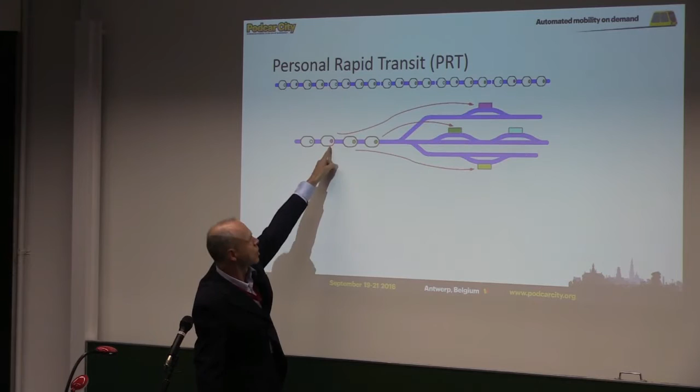Okay. Now, of course, there is the idea of personal rapid transit, where each vehicle contains a person or maybe two, and they have their own destination. So each person here with a color reaches its destination. Here I put the same color, so you see that. Just to explain the concept, and that's pretty known. It's a full individual service, but it has really a low capacity.

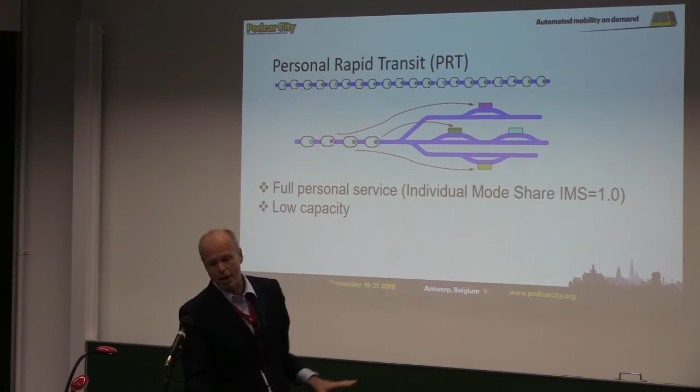And why does it have a low capacity? Because so far there is the brick wall stopping criteria, and that imposes that.

Is that a laser or something?

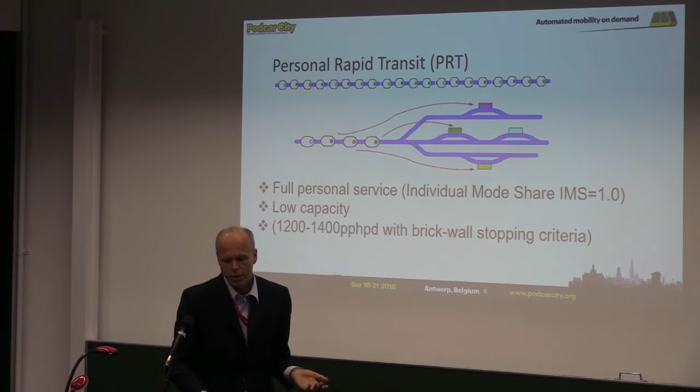Oh yeah. Okay, so it imposes that there is a certain space, and we leave this space. The capacity is quite limited. Right. So what do people do? The first thing you do, you increase the number of people in the pods, and you say, okay, we put four people inside. For example, we keep the size. We put 4 people inside, and we let this be kind of a collective system, like a small bus system.

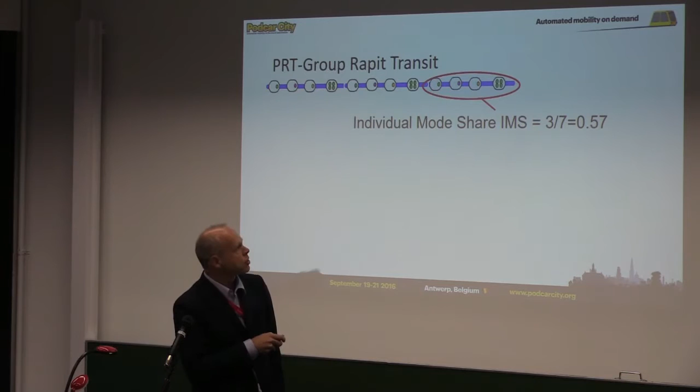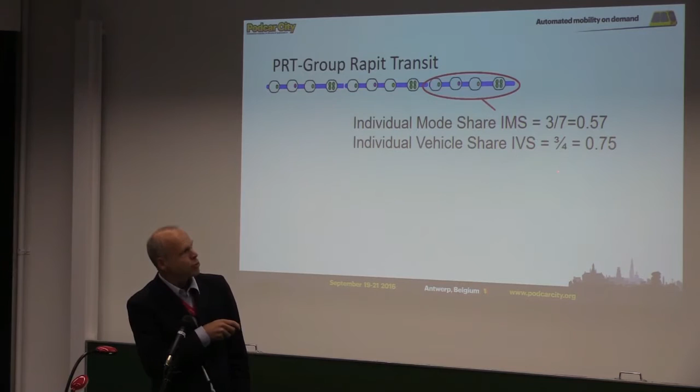I just want to say here that I introduced the variable individual mode share. This is just the number of people with individual destinations, and the rest is, of course, then collective destinations. There is also the notion of individual vehicle share, which is different, but these two are linked. But the individual vehicle share is actually determining the capacity.

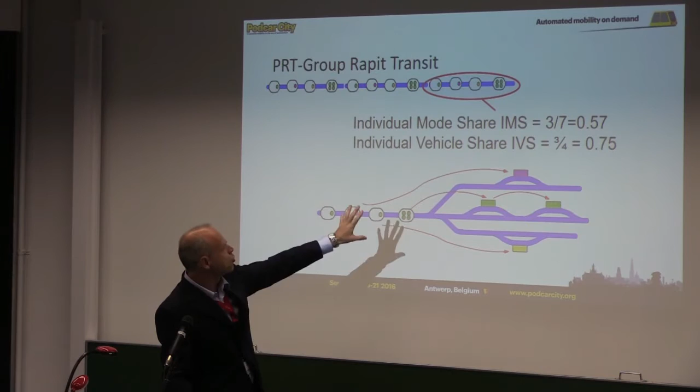But okay, so the idea is this collective vehicle is stopping. It's like a bus, while the others are directly going to their destination. This is just to illustrate that the concept is already known. And okay, if you do that, you're better with your capacities. Depending on the speed, you can reach 4,000, even with a small PRT four-passenger vehicle.

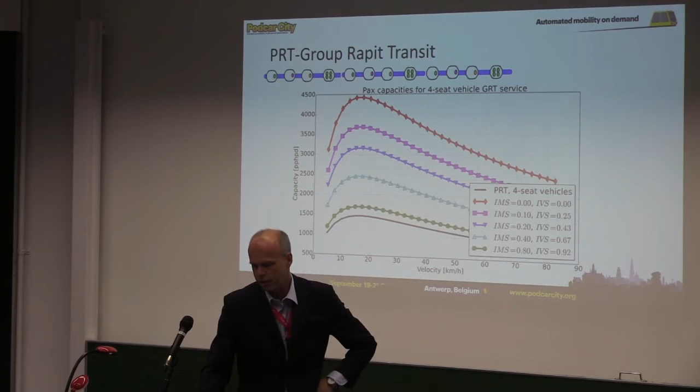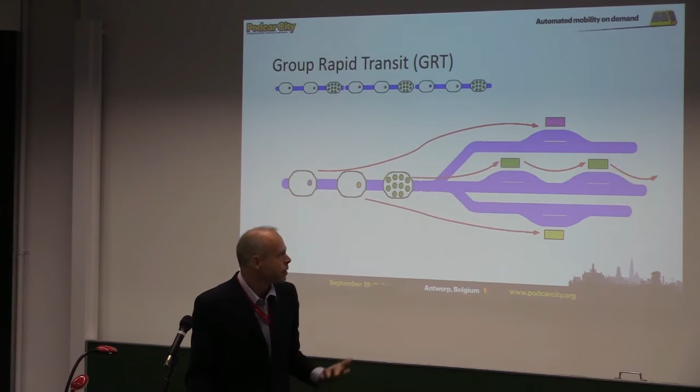If that is not enough, you just grow the size of the vehicle, and this is what most PRT producers do, making vehicles bigger. You can, for the collective transport, the kind of bus that stops over, get higher capacities, but you still have the individual persons that want to travel. You see that, but they need bigger vehicles. So all your infrastructure gets bigger, stations get bigger, and this is for all collective transports.

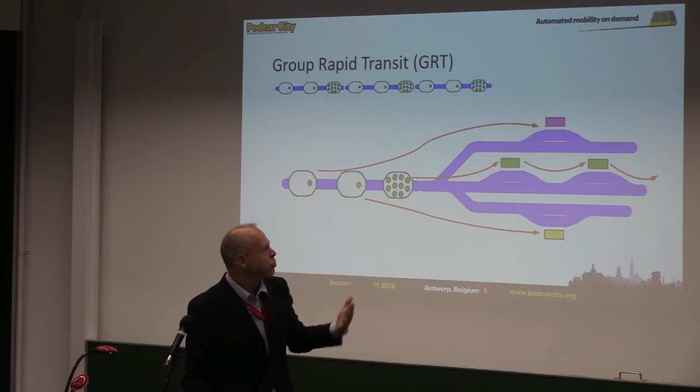Your trip for the individual here gets slower because it needs to stop everywhere. So you get a slower speed, and you need actually more vehicles to provide the same service with respect to individual vehicles, because you slow down the service.

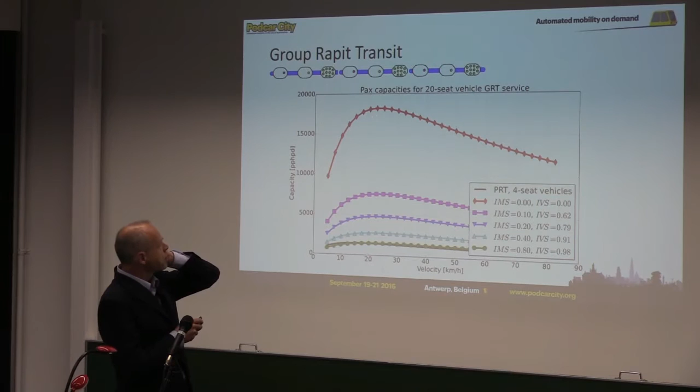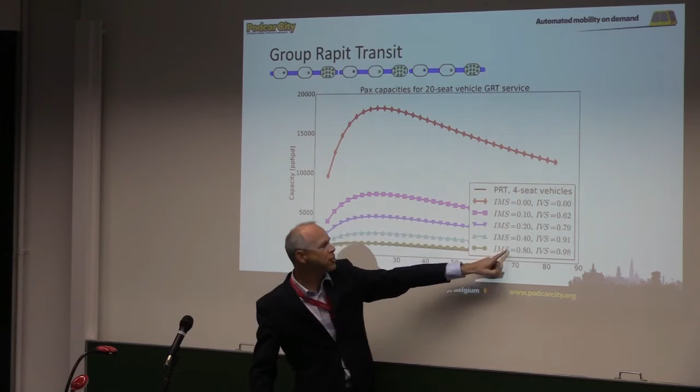Right, you can get high capacities, really up to 20,000 or close to 18,000, dependent on the individual mode share, because the more individual vehicles you have, the lower is the capacity, and it drops pretty fast, you know. So if you have 80% individual vehicles, you have the same capacity as you have with a normal PRT. So that's kind of not so great.

And the other possibility is, of course, you chain, or you form trains. Okay, you form trains, and you put them together, and you do actually the same thing, but with trains. So your infrastructure remains the same, same vehicles, but your stations get a bit longer, of course.

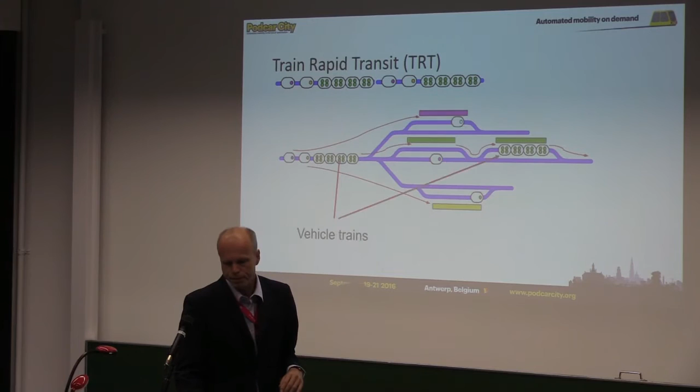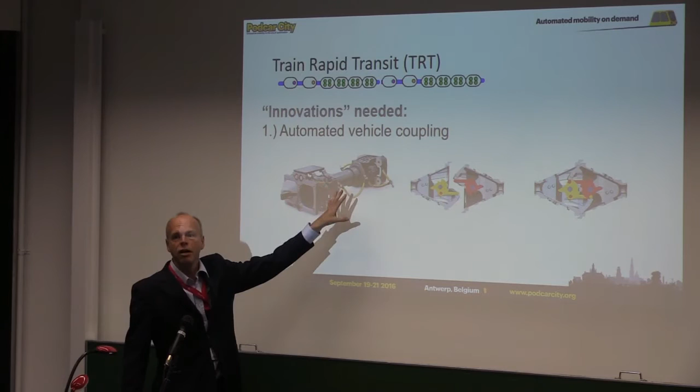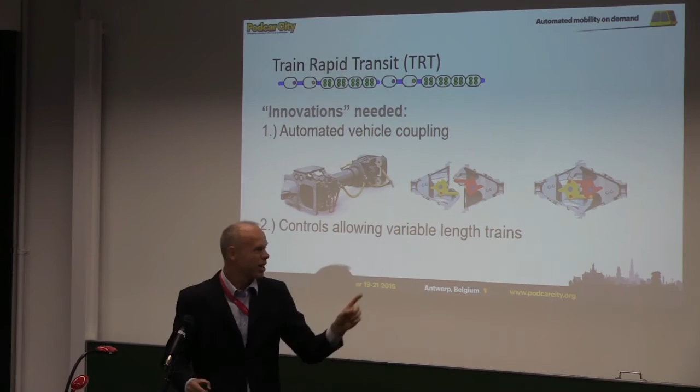Yeah. What do you need for that? You actually don't need so much innovation. You need automatic coupling. The concept of that exists already for over 100 years, so that's pretty known and used also in normal trains. Probably scale it down. And you need a control system that allows variable length trains. That's a bit tricky, and that's probably why most producers didn't go this way.

Still, if you do that, you can reach also 20,000, and you can even reach it at higher speeds, and that's good news, because the faster you run, the more trips you do, the more you earn, right? Okay, and there is another extension to that. Yeah. Just in the previous slide.

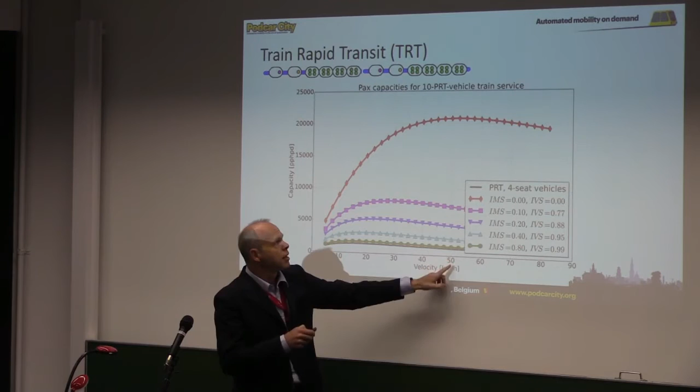Previous. Your capacity doesn't seem to increase when you go beyond 50 kilometers per hour. Why is that? Sorry, here's 50. And then the volumes don't increase. Yeah, it's because of the brick wall stopping criteria. Practically, the distance between two vehicles increases with the power of 2 with the speed, and the flows increase only linearly with the speed. So you get this drop. Yeah.

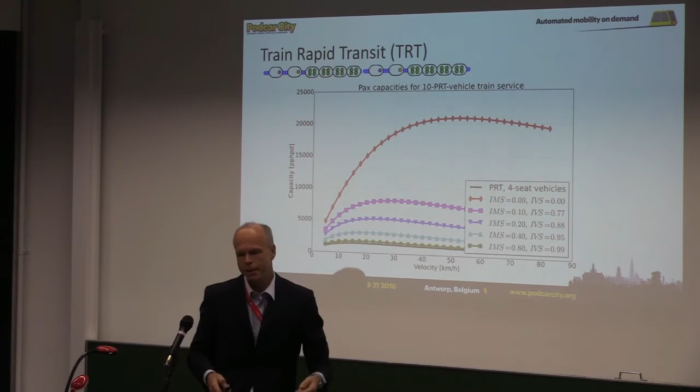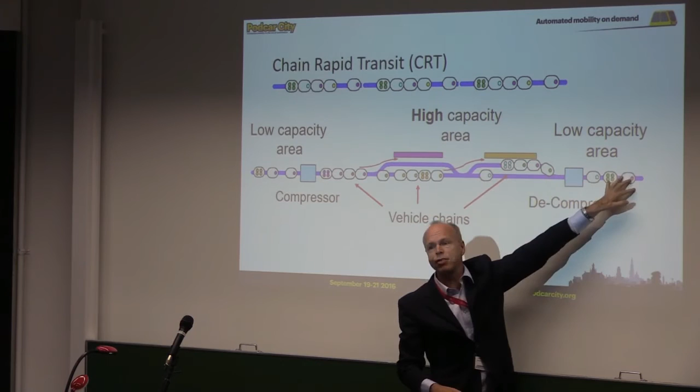And then they reach their destinations here, and then probably other people go in, and they want to go out of the high capacity zone, and they have these different destinations. And then they run through a decompressor, and then the vehicles are individual again, or low capacity here, of course. So how does that work?

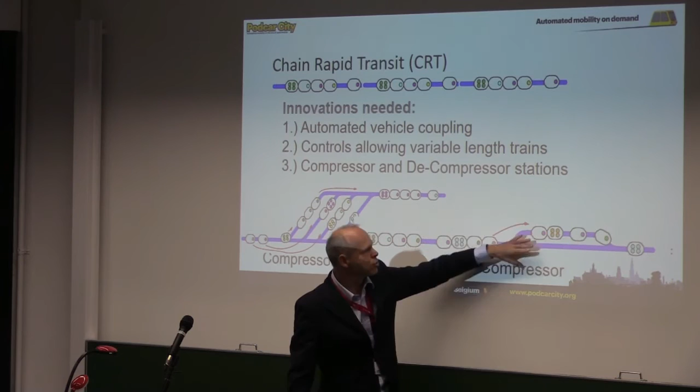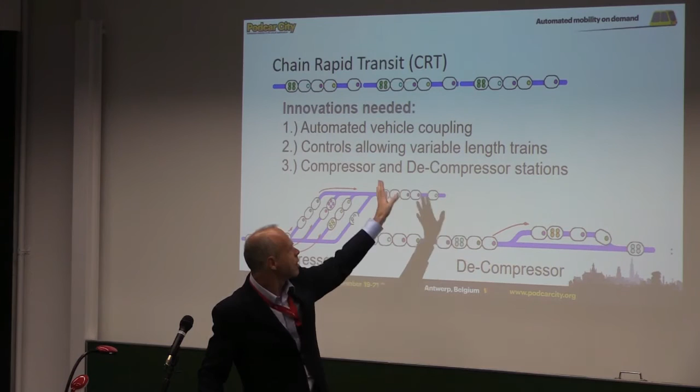Okay, the innovations needed are the same for the train system and these decompressors. This, for example, is a compressor, right? And here you just chain up vehicles with the same destination, all right? And then you create chains. And a decompressor, that's a normal station, right? You just stop, and then you run off one after the other, and you have decompressed the thing. So it's nothing new. Brick wall stopping criteria, couplers. It's all nothing new. It's just different organization.

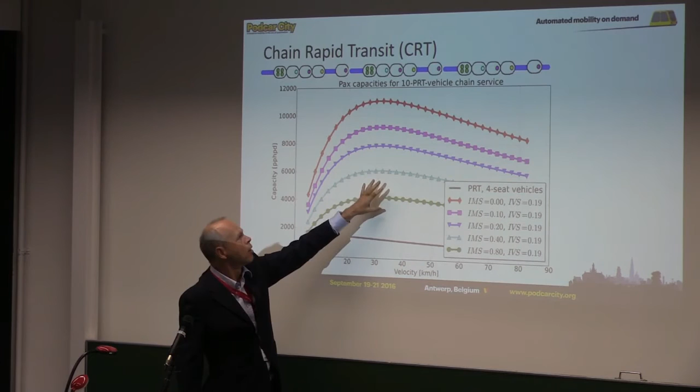Okay. Yeah, and then you can reach also 10, 12,000 passengers per hour, but the big difference is that you're no longer so sensitive with respect to individual mode share. So you can run individual vehicles without being penalized so much in capacity, and that's very important. So you can offer individual service also at higher capacities.

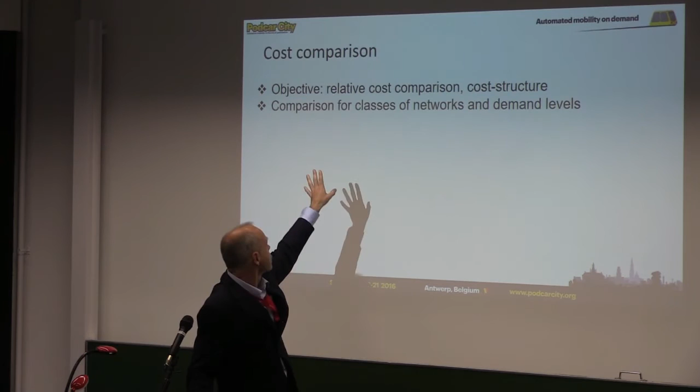Yeah, cost comparison. I did a cost comparison, and of course in the cost comparison I need to put in some costs, but these costs are a kind of target costs. I mean, if you go now to the producers, they will give you different costs. Yeah? But these are costs already with some volumes of vehicles in mind. And in this comparison I also compare network classes. So not an individual city, but a class of city with a certain demand structure.

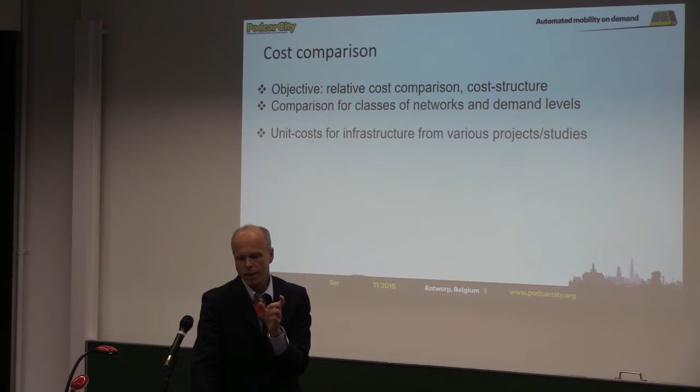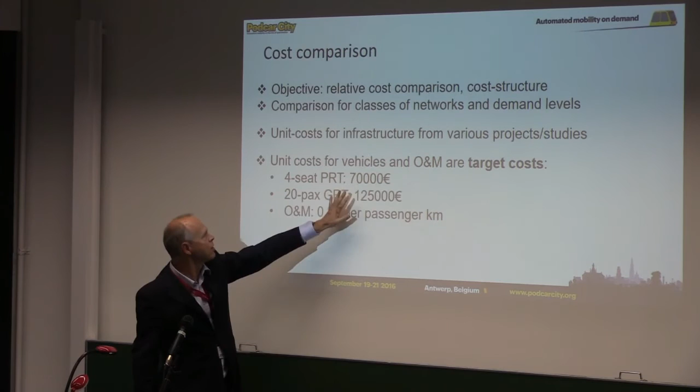Okay, so the unit cost for infrastructure, I got that from various studies. The O&M, they are pretty known, right? At least average values. And here I used target values: 70,000 for a 4-seat and 125,000 for a 20 passenger vehicle. O&M is 0.2 euros per passenger kilometer. These are all values that are still reasonable. Ticket price, I just had to set a ticket price to make the comparison: €1 for a collective trip, €2 for a personal trip.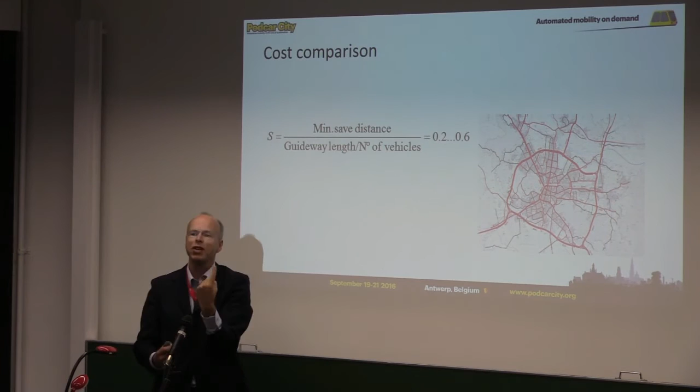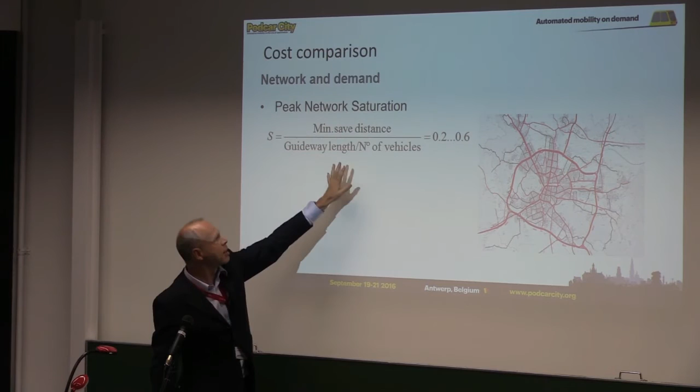All cities have during peak hours a certain demand structure, a pattern, right? And this pattern can be condensed down to two variables, and this is the peak hour network saturation. So this is the minimum safe distance divided by guideway length divided by number of vehicles, and this is usually 0.2 to 0.6. Professor Anderson actually proposed that as a way of analyzing networks,

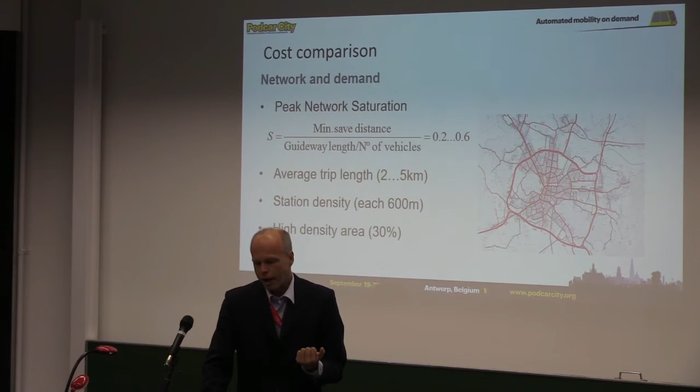and this is pretty cool. And I need the average trip length. So these two variables can quantify the demand level and how the demand is distributed. And from that, I need the station density, which is 600 meters. Okay. And I also introduced a high density area, which I assigned with 30%. All these can change, but they change only in a certain range.

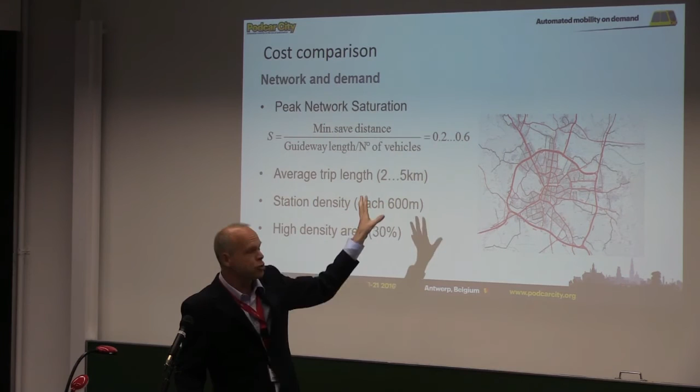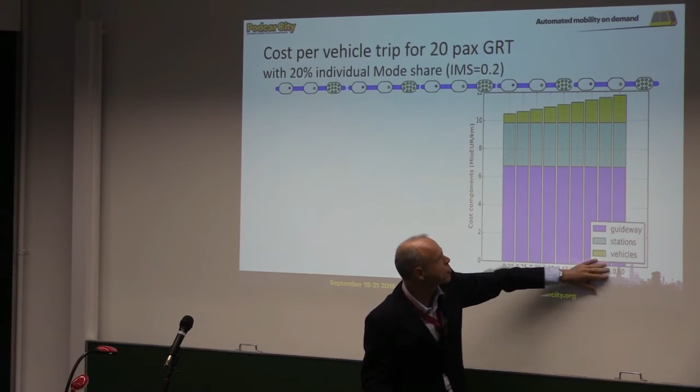All right. So what do I get out of this analysis? This is, for example, a group rapid transit. This is the cost structure: guideway, stations and vehicles as a function of the network saturation. And if the network gets more saturated, I need more vehicles, of course, and they cost more.

On the cost side, so this is the line. So this is cost in euro, and this is the price I get for one vehicle trip, right? And these are the costs of one vehicle trip. So these costs should be, of course, lower than what I get from the ticket. Right? And I did that for different network saturations. Again, your city will be somewhere here, definitely.

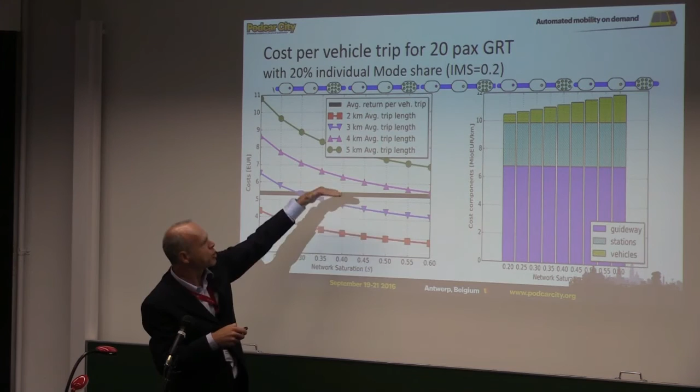And here, these different lines are for different kilometers of trip lengths, right? And of course, the longer the trip, the higher the cost, right? And so you can see here from which trip lengths on you can actually make profit. Average trip, of course. All right. 2 minutes. Okay.

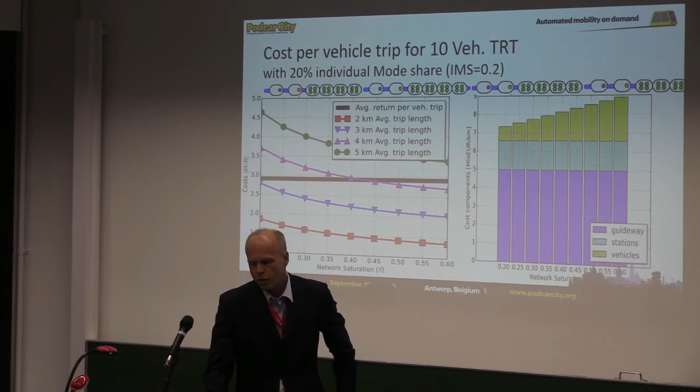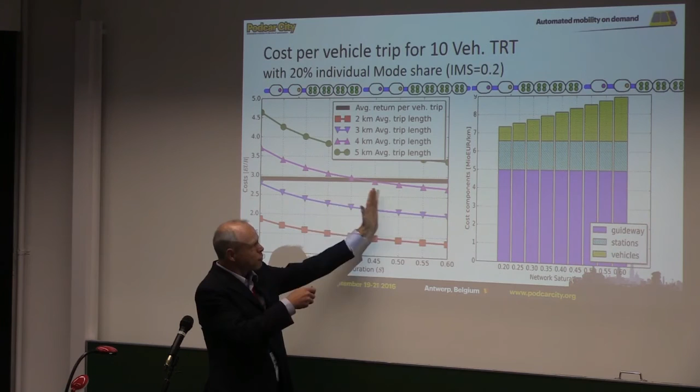And right, I did that for different systems. You can see that, for example, for the train system, you can get a lower cost. So you have a larger range to get the costs under what you gain. Right, and this is probably the most interesting diagram.

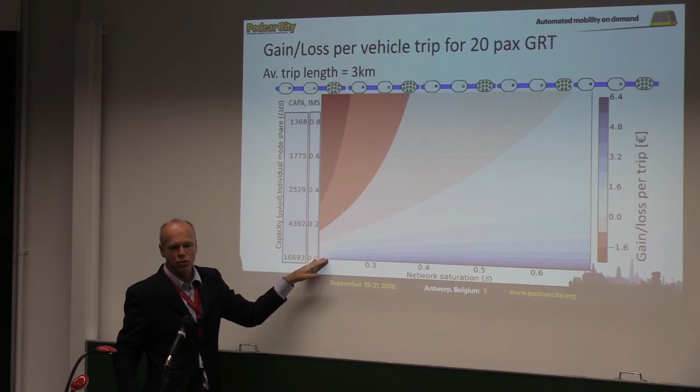And here you get it for the 20 passenger GRT, and you see that the blue zone is mainly for if you have zero individual mode share. So you are very good if everybody is using the bus service. And this is for the TRT, and you see it's a much larger blue area. You don't gain so much, but you can run the system on profit on a much larger area. So it applies to many more cities and traffic situations.

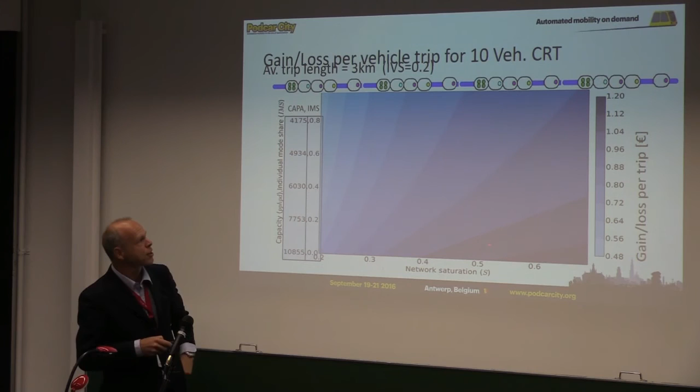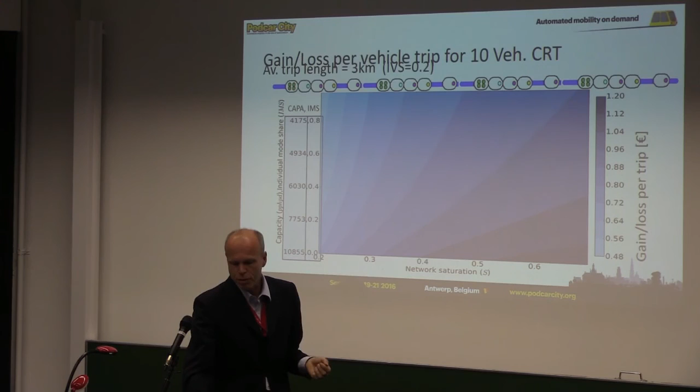And this is the situation with a chained service, with a compressor and decompressor, and you can practically make profit with the same parameters on each saturation and on almost each individual mode share. So that was my talk. So it really depends. The good news is you can transform cities into Podcar cities.

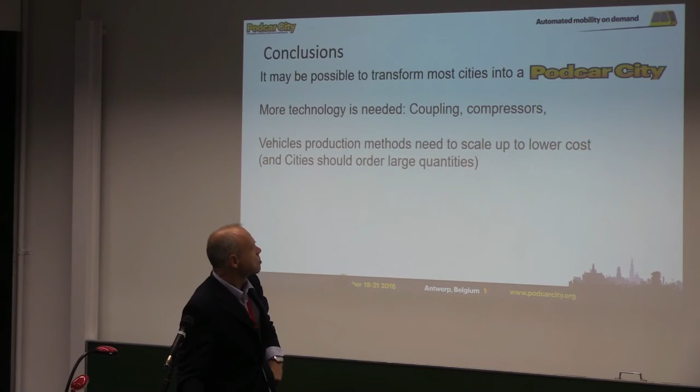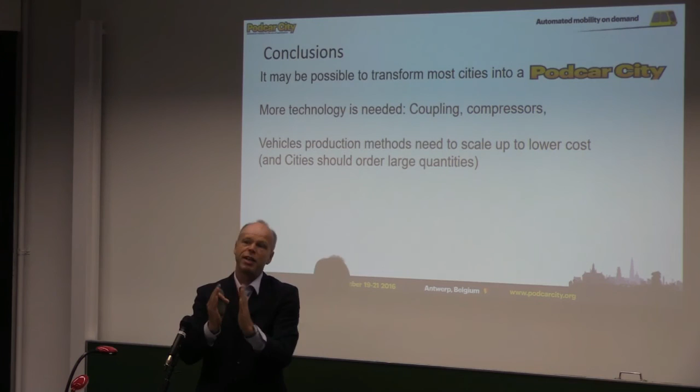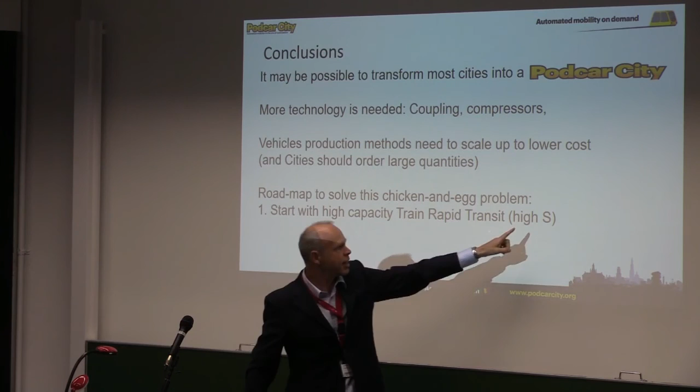You need technologies that are not already there, and this kind of analysis allows you to see where to start if vehicles are expensive. So the roadmap is to implement them first on high S, that means high capacity lines. You start with that, you gain some money, and then you're gonna extend also to low capacity lines. Okay, so that was my talk.